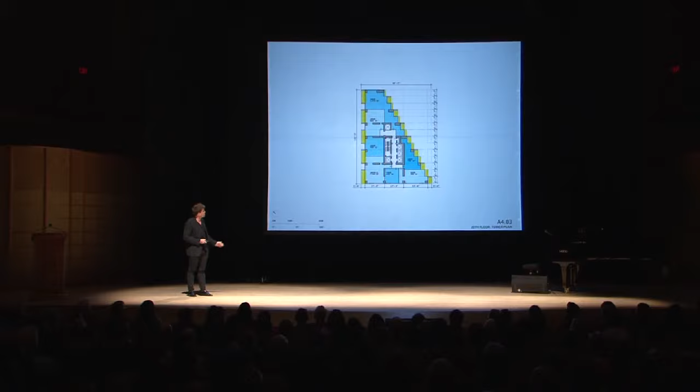So as you move up through the building, you basically complete the rectangle, and you have this rather unusual shape created in a very straightforward and simple way.

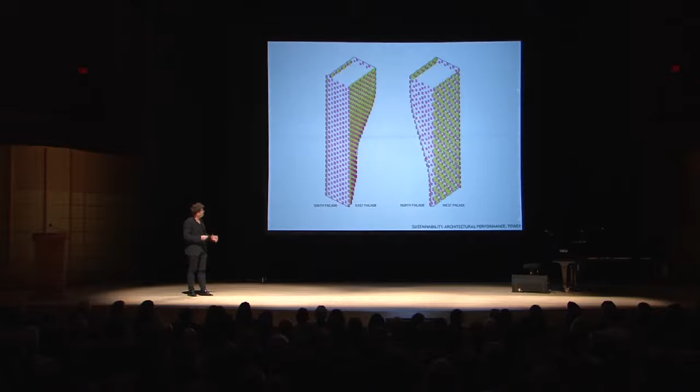The texture on the facade is the balconies facing east and west, and they also help in a very passive way the environmental performance of the building, creating natural shade. As you can see in this diagram to the right, in the summer, having big beautiful windows to enjoy the view would cause you to fry in the sun—so you have the natural shade—and in the winter, when you really want the sun to help heat your building, you'll get the daylight in. This very simple principle we've applied on both sides.

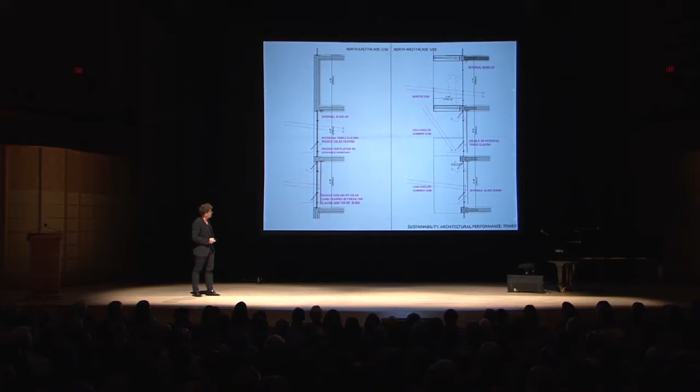As for the facades, we're looking at various options. Obviously this project is in a very early stage, but one of the ideas we've been tossing around is maybe to work with a local British Columbia material, zinc, on the facade, but then almost like a liner in the three-dimensionality of the balconies, work with this golden stainless steel material that would reveal the texture of the building and have this warm liner within an otherwise very simple sculptural silhouette.

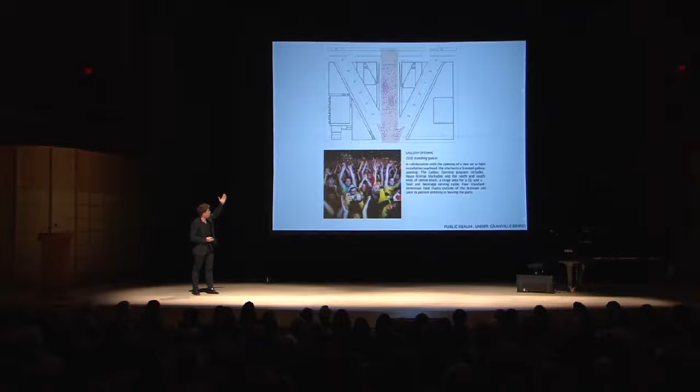You can imagine that during the day, to maintain the liveliness of the shops and restaurants, to have parking, and then in the evening, or on special events, restaurants could spill out, or different events could occupy the space under the bridge. Working with Westbank and the city, we came up with a whole range of ideas that you can imagine would be able to occupy the space under the bridges.

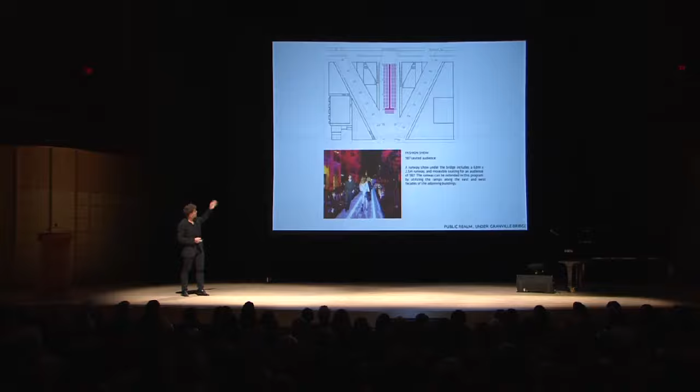The Copenhagen Fashion Week normally puts a catwalk down through the city. It could easily happen here. To exploit the fact that you have a space overhead, you could have these three-dimensional performances, or even a permanent climbing wall. So various ideas that we introduced to try to see how you could occupy the space.

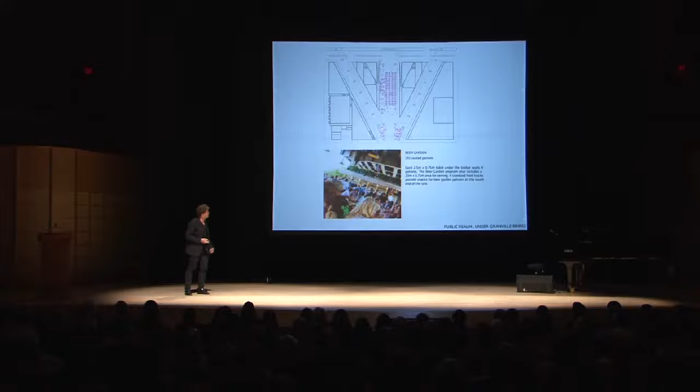The High Line in New York City has a series of things happening under it, including this incredibly popular beer garden. So in a way, this unanticipated side effect of the infrastructure could actually trigger a whole body of interesting things: a market, various fun activities, even a community dinner for the neighborhood could happen there as this extremely long dining table.

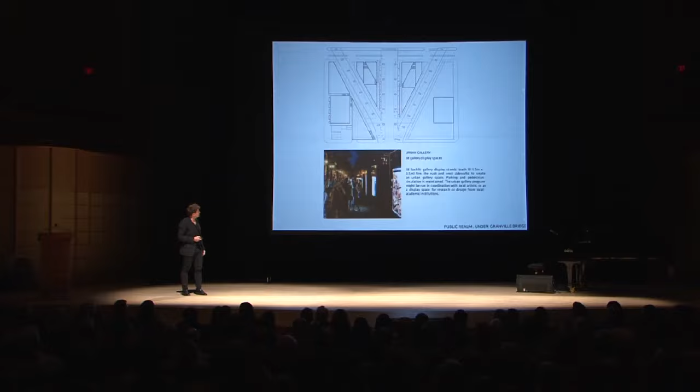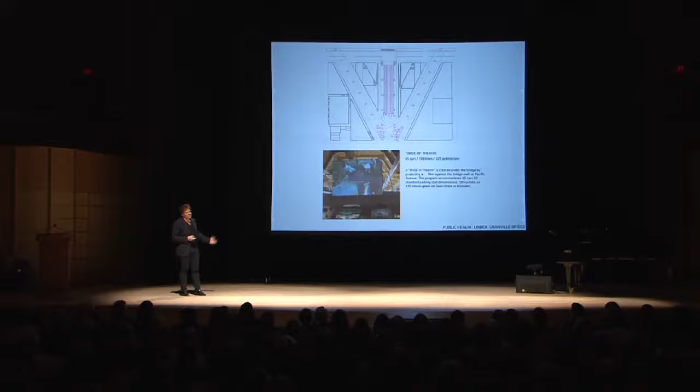Various festivals - there's going to be like 150 of these slides. Even the underside, you can imagine, like in this case, the idea of spilling out for a festival, like an outdoor cinema, and the fact that you can drive there could be some excuse to pull out your 1960s Chevy.

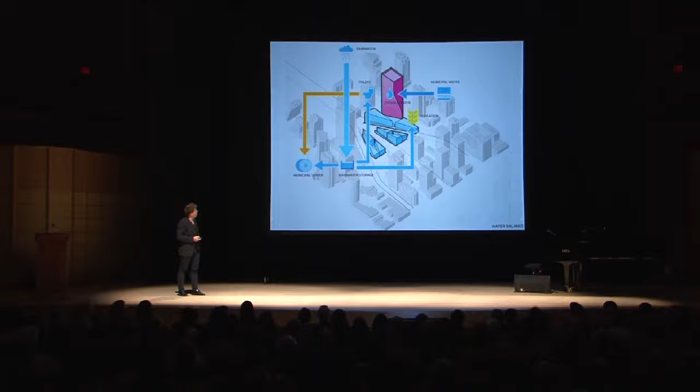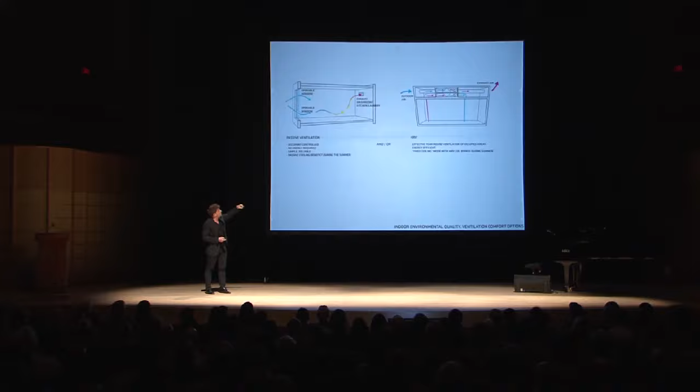Also, the project is in the early stages. We're looking not only locally, but also in collaboration with the surrounding community, to try to exploit as many possibilities for synergy as we can in terms of the environmental performance of the development. We're also looking at various off-the-shelf technologies that are quite common in Europe, in terms of reclaiming or reharvesting the heat from the ventilation air, or ideas of having thermoactive slabs to maintain a more stable temperature inside the buildings in a very cost-effective way.

So all this is being processed right now, but I think one of the main reasons that makes a building like this sustainable is this whole urban experiment that is Vancouverism - to see how densely we can actually inhabit so we don't have to drive.

You know, it's much more energy efficient to take the elevator than to drive around. As a result, an average citizen of New York State spends a quarter of the energy that the average citizen of Texas does, simply because of the density.

So if you want to continue this development, eventually downtown is going to run out of space, but you have all these areas that are in a way dominated by the infrastructure. And of course, the whole notion of celebrating the arrival to the city across the bridge, especially the idea of turning a potential social life out of what could be deemed a problem, the infrastructure. And the fact that the site is really outside the view cone, so if you really want to densify, this is where you can do it.

So I think in many ways there's an incredible opportunity to add this new silhouette to this quite striking skyline of Vancouver. And at some point, things also become about proportions. We did various studies of different heights, looking at what the building would look like.

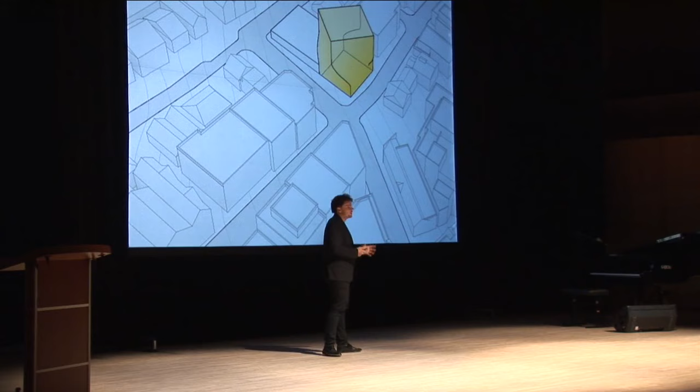It's essentially a sandwich of galleries — a media gallery at the bottom that's nested into the sloping site, and then a sort of daylit gallery at the top that is turned to greet people arriving from out of town, almost like a friendly building that turns its head to greet visitors.

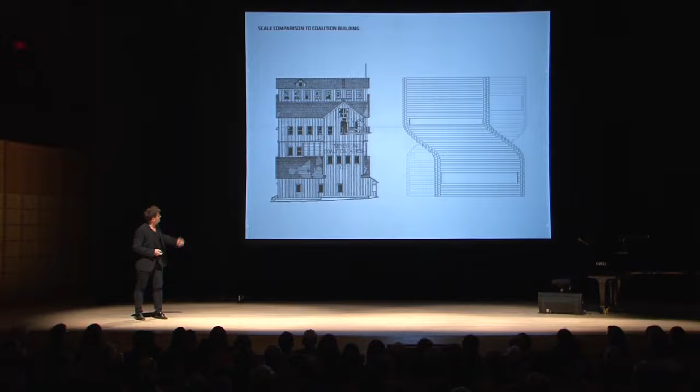It has exactly the same proportions as the Coalition building, so we really like this idea that in a way it's re-invoking the ghost of the Coalition building, the landmark of Park City the industrial town, almost as the landmark of Park City the cultural city.